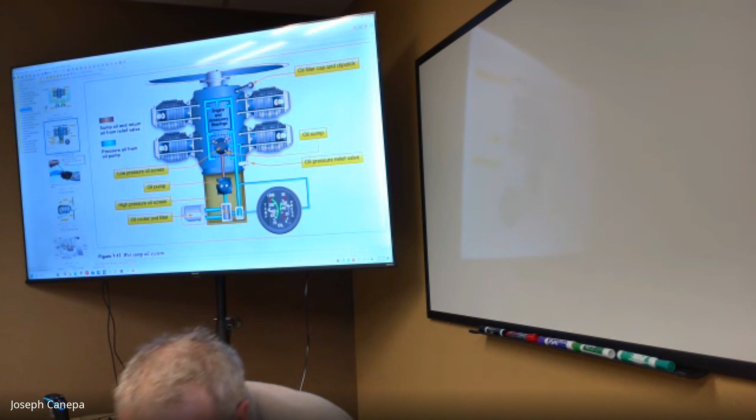No questions so far on any of the engines stuff that we talked about, systems?

Hey, Tegan. Hey, Jocelyn. Good, good.

Tom Cunningham is coming in today, I hope, at 10:30. He's an A&P, actually retiring. He has a very successful aircraft maintenance business over there, but at the end of the month he's retiring. He said he'd come in and talk to you guys a little bit about A&P, airframe and power plant, mechanics type stuff, a couple things.

I thought that would dovetail well going into the aircraft systems and then instrumentation. Next week we have Alyssa McGraw, an engineer from Sierra Space. They build these habitats that actually go into space. They're probably going to take the habitats she's designing to Mars—well, not quite, but very fascinating what she's doing there. If you get a chance, look up Sierra Space on YouTube, they did what's called a destruction test. What she designs are these habitats that inflate in space.

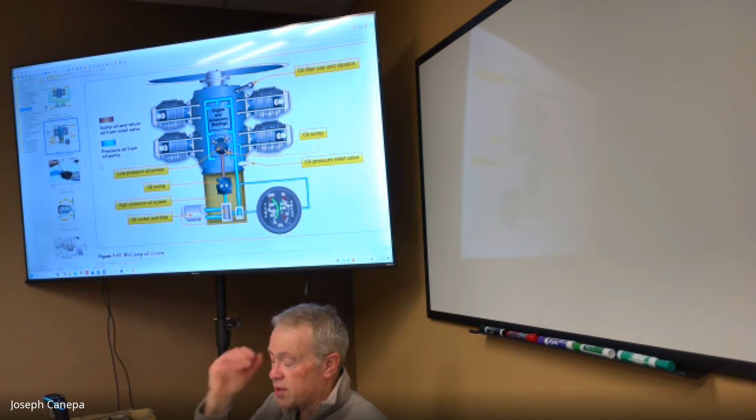And then someday I'll be over here with the twins. My twin is just getting out of annual inspection, so I was thinking of later in the day. There's still some things they've got to finish up on it, so that happens. Let me see something.

The twin Comanche actually does have 6 seats. The 2 far back seats are really small, basically for very small people, kids. I removed them and just use it as a 4-passenger—it's also better for insurance.

It is designed to take 6 people. A lot of what you're finding in aviation is that a lot of planes with 6 seats or 8 seats are somewhat restricted by how much fuel you can put on board. You can't do full tanks and then load all the people in the plane—you can't throw in all the baggage and all that stuff too.

I think you have to be really careful. Jason and I were just talking about weight and balance, so that's something we're going to talk about, and you'll see it when we do weight and balance. Because if you load it incorrectly or if it's overloaded, the plane may not even get off the ground. Or worse yet, it'll just get off the ground and stay in ground effect—it'll just hover.

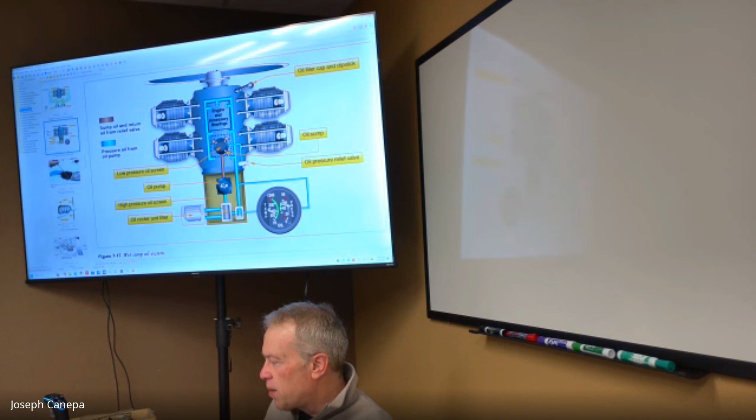The dipstick we're all familiar with from the car - it's the same thing here. The oil pressure relief valve - if there's too much pressure, it's going to release that. So the main components are the low pressure screen, the high pressure screen, the filter, and the pump. That pump is going to push it through little galleries in the crankcase, so that everything that needs to get oil gets it.

Another thing that oil does is help prevent corrosion. After you get done flying, that oil is kind of splashed out all over the place, and that helps keep the water from getting into the metal.

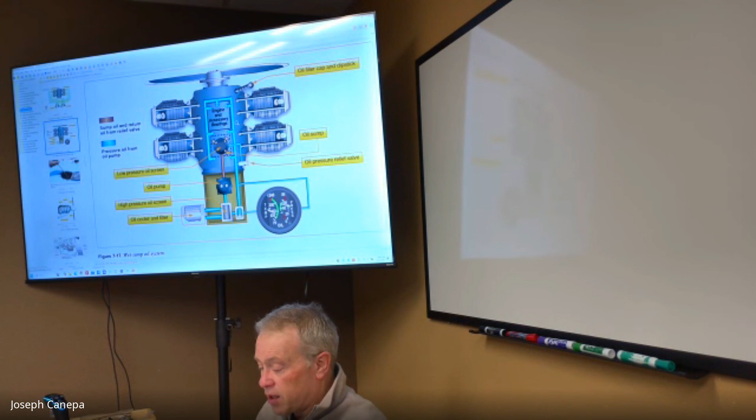So oil is super important. That's why when we do pre-flight checks, that's one of our primary things. There's a lot of things you might be able to skip, which is not a good idea, but the one thing you never want to skip is the oil. You always have to check to make sure. If you had to jump in a plane in an emergency, the first thing you would do is check the oil.

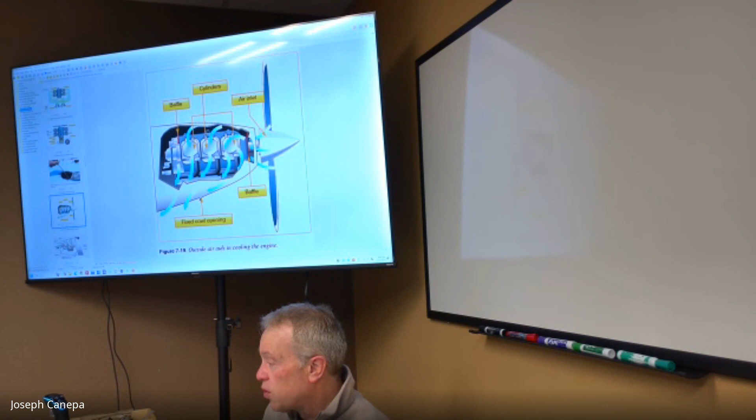So other types of cooling systems. Oil cools the engine, but we also have open cowlings. This is a cross section of an aircraft. In the front, you've got openings on either side of the prop, and we can see air flowing through. How the air flows through that engine is very critical. Engineers design these cowlings to very tight specs to get proper airflow across the cylinders, flowing in and around them, drawing the heat away.

This right here is what's called a cowl flap. It's just a little opening. If you look at the bottom of the cowling on some higher performance aircraft, they'll have a little door that opens up. Usually when they're on the ground, that door is open, primarily because you're not getting as much cooling effect from the air. So they open it up to allow more air to flow through. The Cessna 182 is a classic example. It's like a 172, but with a beefier engine, and because of that, it has these open cowl flaps that allow more air to flow through.

So, engine cooling systems. Then obviously we've got water cooled engines, which we don't see generally much in smaller aircraft here.

Does anybody remember the 4 strokes of a 4-stroke engine? Power stroke, exhaust - yeah okay. Those can be hard to remember, but just remember, when you breathe, you're literally like a human 4-stroke engine. You're inhaling - that's the intake - and then you're compressing, generating power with your lungs, and then exhausting it. So you've got 2 of the 4 strokes there: inhaling and exhaling. The power strokes are in our lungs, from the way we're made up.

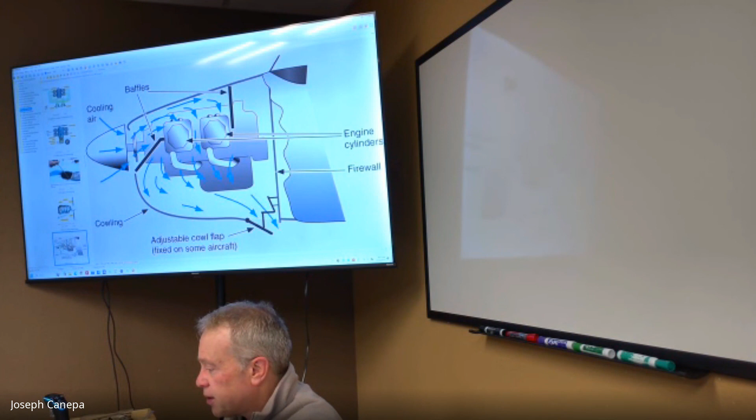So how this works is, after you do your pre-flight inspection and test everything and you're ready to start, you'll call clear prop, then hit your alternator or battery button - sometimes both at once, but usually at least the battery - which ties the battery into the system. Then you'll turn this key switch, sometimes just a push button, not always a key inserted into the panel. You'll turn it past left, right, both, and then it springs back to both. So you crank it to start, the engine cranks, and once it's started, you let go of the switch and it falls back to both magnetos. So again: off means the magnetos are off, then left magneto, right magneto, both magnetos.

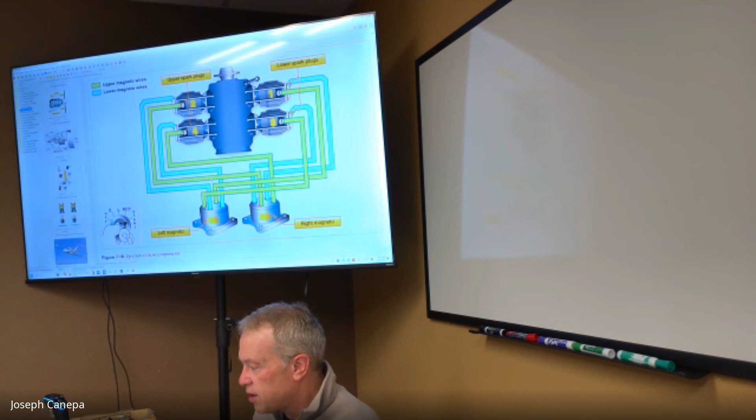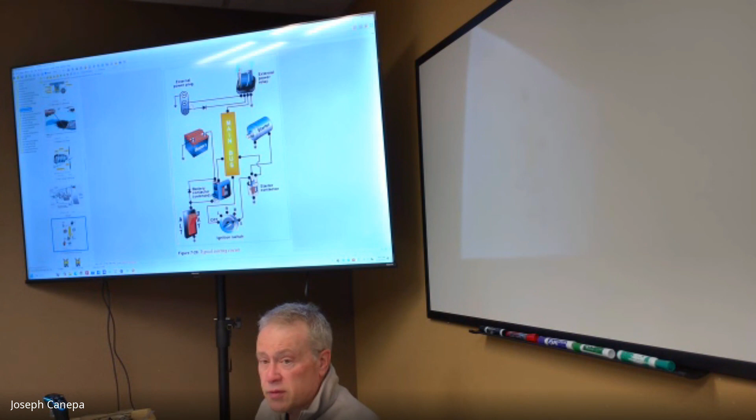A lot of aircraft do have an external power plug to jumpstart it. If you need to jumpstart it, you just plug that in and go from there.

So they do talk a little bit about two types of scenarios here, the combustion process. There's a couple things that can happen with combustion. It's kind of curious, but normal combustion is when the spark plugs ignite the fuel air charge, and there's a wave front that pushes out and generates pressure against the piston and pushes the piston back, so it's a nice smooth flow. A lot of times, at least this is what I thought before I learned about this - I always thought it was just an explosion in the cylinder that blew the piston back. It's not the case at all. As a matter of fact, you don't want that because it's very hard on the engine. So normal combustion is like somebody pushing on that piston, pushing it down and getting it to rotate the crankshaft. This would be normal combustion.

Explosion, or sometimes what's called detonation or preignition - those are two terms you're going to have to know for the test, by the way. I'll get into that in a second here, but that's when something happens, something goes wrong. There's too much pressure, and the fuel air charge explodes. It can damage an engine in some cases in as few as 10, 15 seconds if you get a lot of that. So detonation is a really bad thing for an engine. Normal combustion, obviously, is what the engines run on.

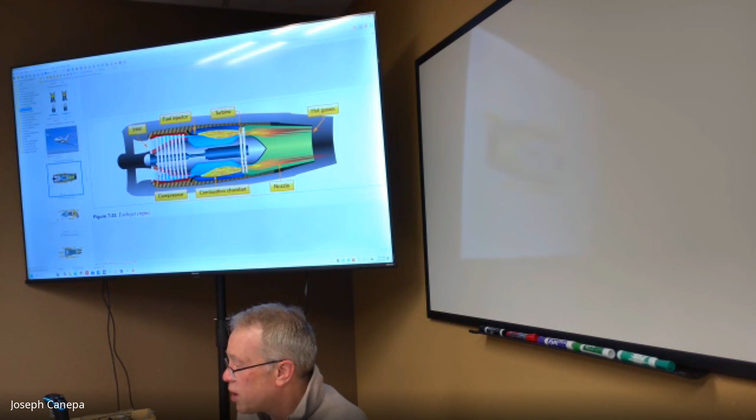This turbine right here helps drive the engine. As those exhaust gases pass through it, they spin this, causing this whole shaft to spin. There may be some gear reduction there or an increase, but regardless, you've got expansion through the combustion chamber and then it blows out through the exhaust. Notice how small and narrow this whole engine is, whereas if you go to a turbofan...

So this is a turbofan engine. Notice you've got a huge fan out in front. A turbofan still has the same 4 processes: intake, compression, combustion, and exhaust. But the big difference is you've got this big, huge fan that bypasses the inner part of the turbojet engine. This is actually designed to produce thrust, but it produces it outside of the engine itself.

That's why a lot of the jets you see nowadays on commercial flights are turbofans with big, huge openings, whereas in the old days, the 50s and 60s, those were all turbojets, and they found that they were very inefficient. With turbofans, you get much more efficiency when you suck in some of the air and blow it out outside of the engine housing. So that's the difference between a turbojet and a turbofan.

A turboprop is very similar to a turbofan engine. The only difference is you've got a gear reduction box on the shaft, and then you have a prop in the front. So instead of the turbofan, you have this gearbox that drives a prop itself. Good examples of that would be like the King Air series aircraft.

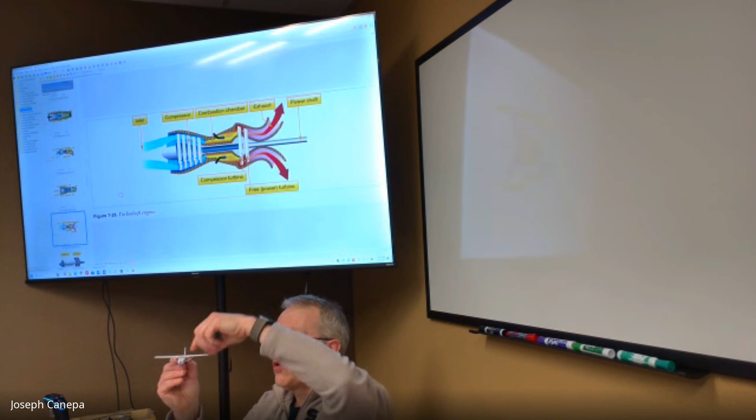Cessnas typically store the fuel in the wings, so you've got two tanks, one right here and one right here in the wings. Because of that, and the engine down here, we can see it below the tops of those wings. So they fill the tanks up here. These are what we call gravity fed in most cases, like all the 172s - most of them have a tank up here and they'll just do gravity feed.

They'll just allow gravity to flow down from here. A lot of the newer Cessnas, I think after some point, they put in boost pumps, auxiliary boost pumps, in there just in case the gravity wasn't enough to get the fuel down to the engine. But in most high wing, especially older high wing aircraft, it's just gravity fed - no boost pumps or anything like that. It just flows down into the system, into the engine, and then you get started there.

A low wing aircraft, however, has its wings and fuel tanks below the engine, so you need some way to get that fuel up into the engine for it to work. So we have electrical boost pumps - they run off electrical power. And then there's the other type of fuel pump, an engine driven fuel pump. Does anybody know why we would have both electrical and engine driven fuel pumps?

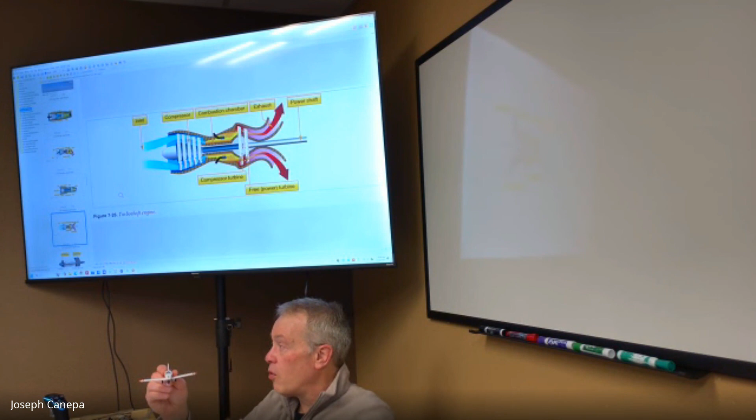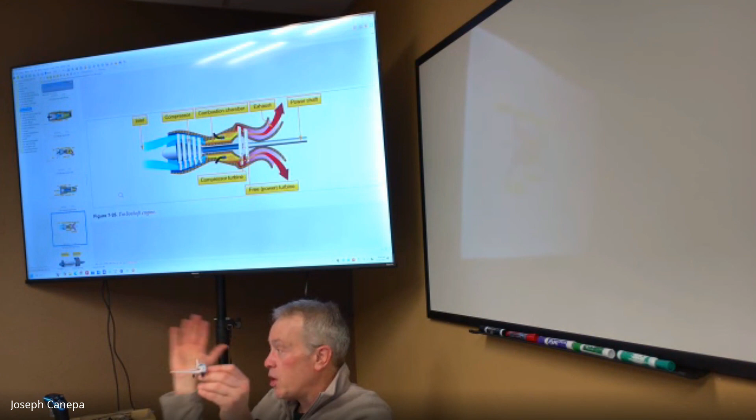You'd need the electrical one because if the engine wouldn't start, you'd have to have an electrical pump to get fuel to the engine to start it. There are other reasons too - redundancy and backups. You need to have those because an engine-driven fuel pump can fail, though it doesn't happen very often. If that happens when you're in the air, obviously that's a problem. So if you've got your electrical fuel pump, you just turn that on and the plane keeps flying, then you land someplace and get the engine-driven fuel pump taken care of.

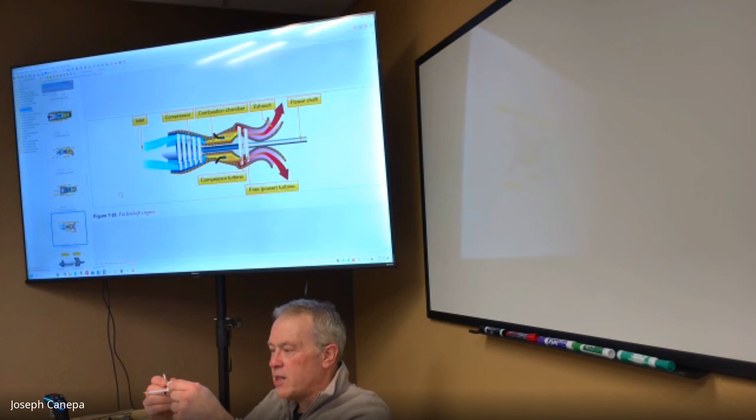So the engine-driven fuel pump is exactly that - it's driven by the engine, pumping fuel into the engine while the engine's spinning. Whereas the electrical fuel pump runs when you turn it on and have power to it.

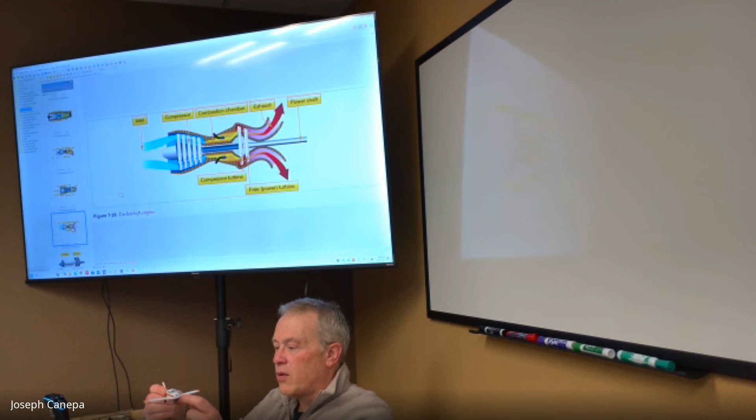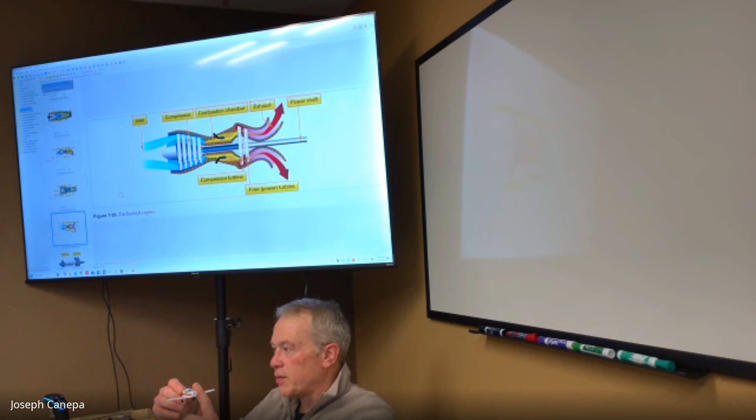The other thing that fuel pump will do is help with priming. Normally most aircraft will have what's called a primer. In the old days, your grandparents might remember this, they had to prime the engine. What that means is they would squirt some gas into the cylinders to get the fuel in the cylinders to get it to start.

Have you guys ever worked on engines and had to start it up using a spray starter? Yeah, we have a snowblower and you have to press the pump. Yeah, it's like a little rubber bulb to start it up. Yeah, so they still have that. That's right, I forgot about that. A lot of the weed eaters and things like that have a little primer too. Leaf blowers, yeah. So that's the same concept you're doing there in the engines. You're going to have a primer.

This is a curious little story. In World War II, there was a fighter pilot that had lost his electric pumps, his engine-driven fuel pumps, and he was coming across the channel and had to land on land. What he found out was that he could use the primer to keep fuel going to the engine. He just had to time it right, and he kept fuel going to the engine with just the primer. So if you ever get stuck in a situation where the fuel pumps are both dead, which would be extremely unlikely, you can use your primer to keep pumping fuel into the engine. It's not good for the engine, but it'll get you down if you needed to do it. I think he did it for like 15, 20 minutes, kept on pumping it, and was able to land it safely.

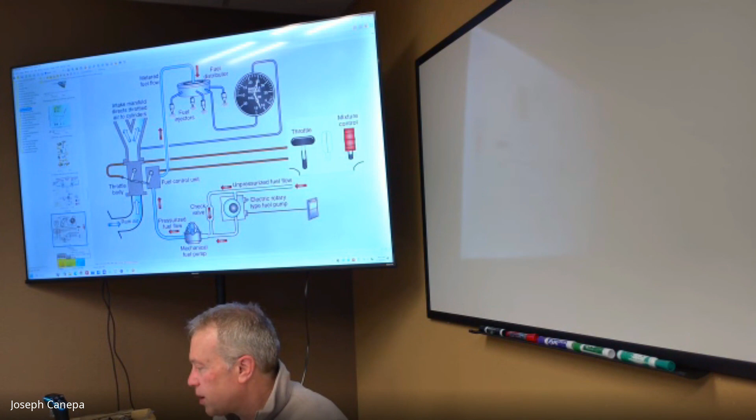There are several different grades of fuel, and some aircraft can only burn certain types. So when you're fueling up an aircraft, you don't want to put in car gas or something like that. Though there are some aircraft that will allow you to run what we call MOGAS in the aviation industry, which is just car gas. They have what's called an STC, which stands for Supplemental Type Certificate, that allows that aircraft to burn auto gas or MOGAS.

Most pilots are going to want to fly with aviation fuel. It's very expensive, typically on the order of at least twice as expensive as car gas. So if you pay $3 for auto fuel, you're going to pay $6 for aviation fuel.

But they're designed to run on air-cooled engines, and the way the engines are designed there's all these different things that are different than an automobile engine that's water cooled. So they take all this stuff into account and they create this blend of aviation fuel.

There's several different types of fuels. The most common one is going to be this 100 LL, which stands for 100 low lead. It's not no lead, it has some lead in it.

Back in the old days, in the 70s, 60s, 50s, car fuel had lead in it. The reason they did that was because the lead actually helps lubricate some of the components in the engine. It also does some other things in there, but what they found though is that lead was extremely toxic. There's a term for it, I can never remember the name of it. It's a special chemical they put in there, and it's very bad. The federal government said we can't have this stuff, people driving cars around with this lead in it, so they banned lead from automobiles.

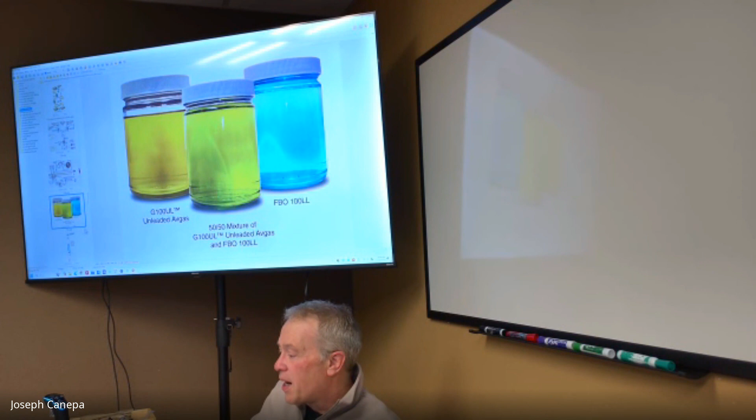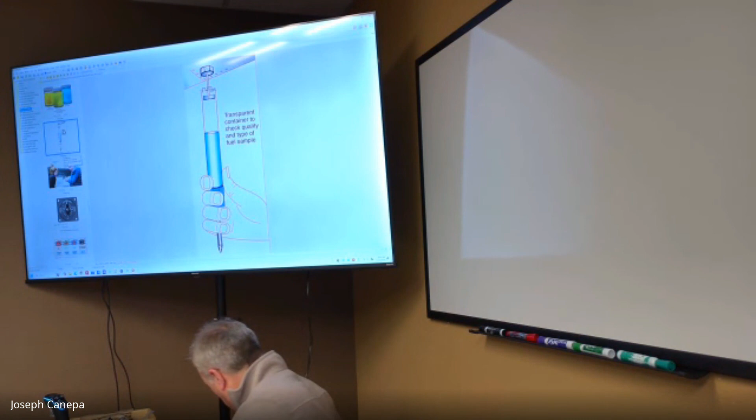So this is basically like a test tube. It's got like a little wire in it. Jace, you've seen it before where you do your pre-flights. Isn't it like on a high wing? Isn't it more like a strap? Like I've done a pre-flight where... Oh yeah, that's another type of way of checking it. So it's like a transparent straw you stick into the fuel tank. You put your finger over it, and then with suction it draws it out. Then you can look at the color of the fuel. That's what I see, yeah.

So those actually measure how much fuel you have in the tank. This right here is draining the fuel out. This is on the bottom of the fuel tank right here. There's like a little nut, and in the center of the nut there's a little hole. What you do is take this little device right here, it's just like a beaker with a little wire on it, and you stick it up into that hole and push it up in there, and it drains fuel down into this test tube.

And then you can actually inspect it for a couple things. Number one, the color of the fuel. It should be light blue. What's that, like if you have water? Absolutely, I'm glad you brought that up. With aviation fuel, it's very light compared to water. So because of that, if there's any water contaminant that's sitting at the bottom of the tank itself, where this drain is, it's going to be somewhere probably back here, you'll see it.

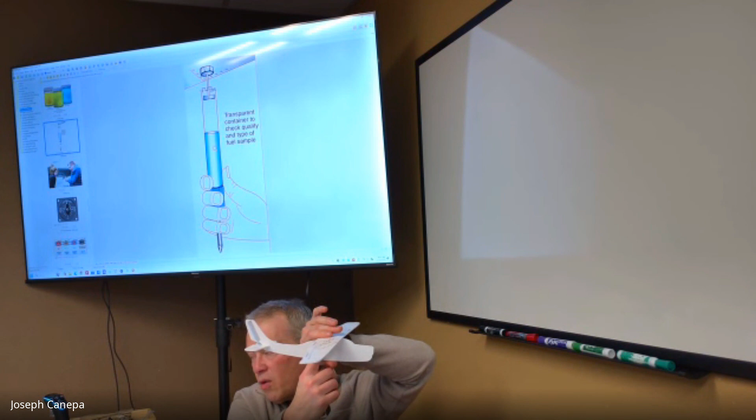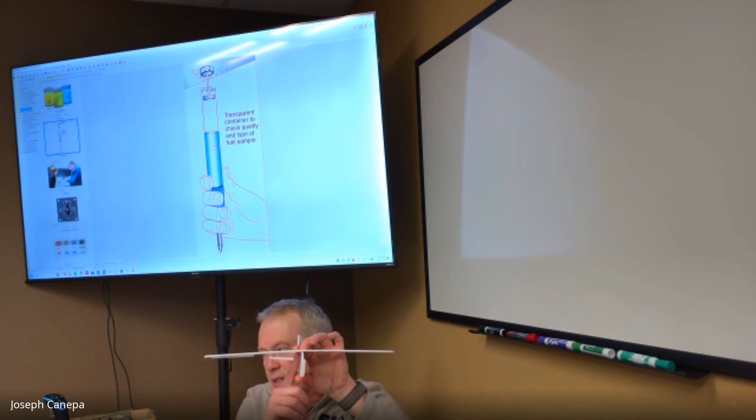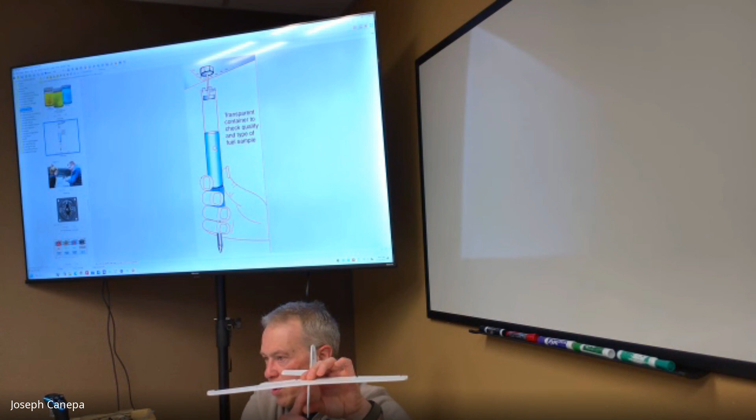There's like a little hole there. If you ever look at a high wing aircraft, you'll see it about that point right there. And again, on this side, same thing, same place. You're going to have one on this tank as well. That's the lowest point of the tank itself. What you'll do is take this little thing, stick it up in there, and it draws the fuel, just kind of leaks down into the little tube there. You hold it up to the light, but because it's the lowest point in the tank, if there's anything heavy in the tank, that's going to go to the lowest point.

And when you put that little fuel tester up there and fill it up, if there's any water in there, it'll get drawn into the test tube itself. What you're going to see is little tiny bubbles on the bottom of the fuel tester. You're going to actually see little bubbles. If you see anything like that, you want to drain more fuel to make sure there isn't more contamination, because obviously water doesn't burn. And if you send it through the engine, if there's enough of it, the engine will just quit. So we look for any differences, and it's very distinctive. The fuel itself does not mix with water, it's like oil and water. Same thing with the fuel and water. You'll see these little tiny white clear bubbles on the bottom of it.

So again, we're looking for, number one, the color of the fuel. 100 low lead is that blue color, kind of a blue tint. You're also looking for contaminants like water bubbles. I've heard of guys draining out their engines after a bad storm and getting nothing but water, so they don't see any blue or anything like that. So you always want to make sure that you check the color.

Yes James, have you ever had water? I have, yeah. It's never caused me problems because what I typically do when I see that, I'll actually drain out quite a bit more fuel just to make sure I draw everything out, and then I'll run the engine up just like I would normally to make sure there are no issues with it. You would notice like shutters, if there's small amounts of water in, it'll make it shudder.

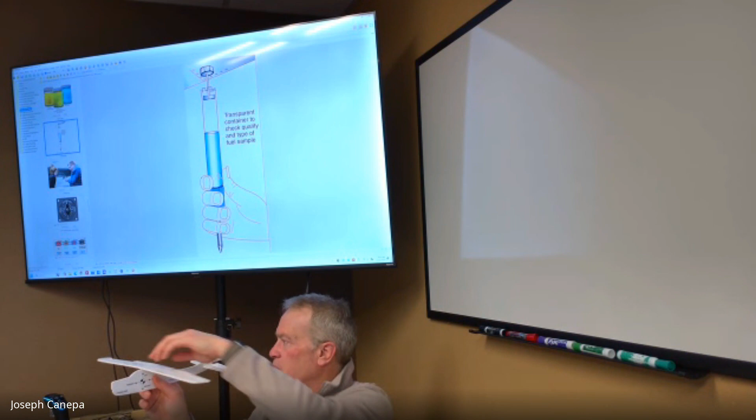Another thing that I do oftentimes, before I actually do the pre-flight, I'll just rock the wings like this. I'll come over here, grab a wing and rock it like that. What that does is it splashes the water up inside the tanks there. It splashes it and picks up some of the condensation that forms inside the tanks. And then that stuff will just over a period of a couple minutes start draining down into the low spot. So that's something you want to consider doing.

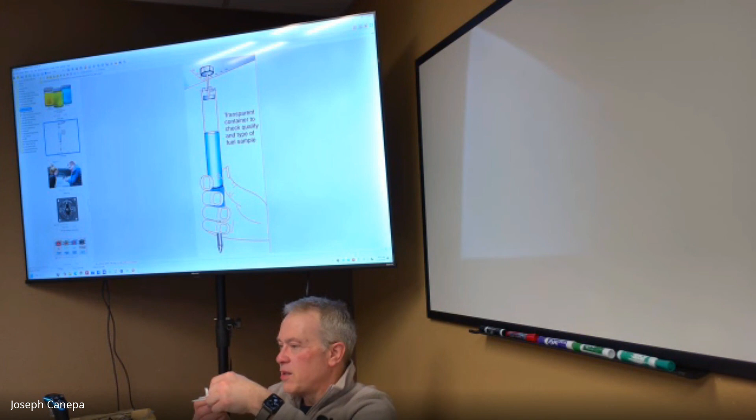So obviously a rainstorm can be bad if your fuel caps don't have good gasket seals. Is there anything else that could happen on a hot, humid day with engines? Is there anything we have to worry about inside the tanks?

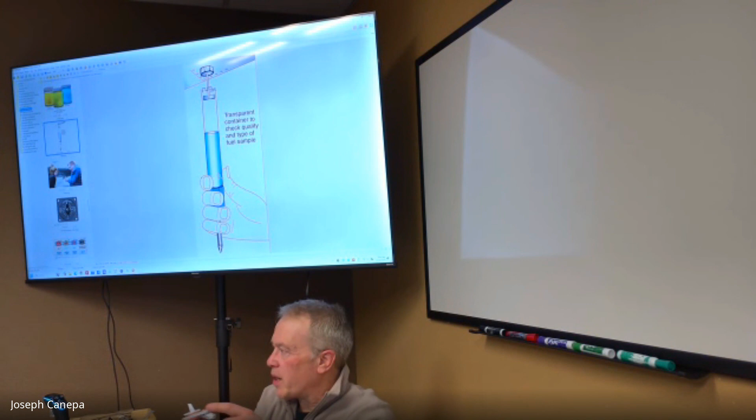Humidity is definitely something to worry about if it gets in there. You've got these tanks inside the wings, and if the tanks are low—let's say the person who flew it before you didn't fill it up—what can happen is dew can form on the insides of the tanks. If there's any moisture in the air, it can condense on the inside.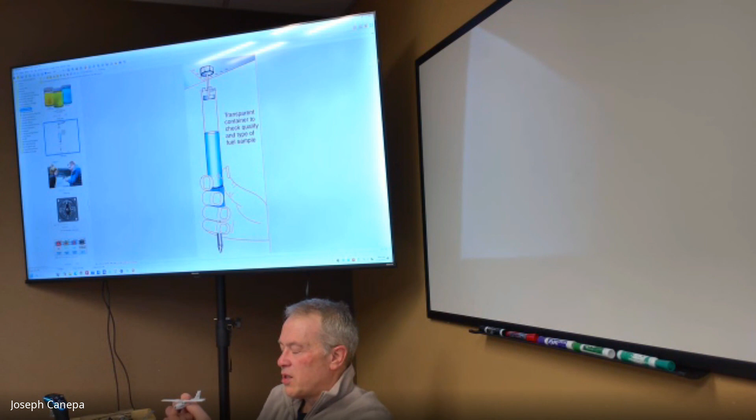That's why I always rock the wings. I walk up to the plane, grab the wingtip, and rock it like that. It splashes the fuel up and washes the dew inside the tanks down to the bottom. Then you give it a couple minutes for the water to settle, and if you drain the fuel sumps, you'll actually see the water in there. So if you're going to fly and the tanks are low and the plane's been sitting outside, that's a good recipe for possible water in the tanks.

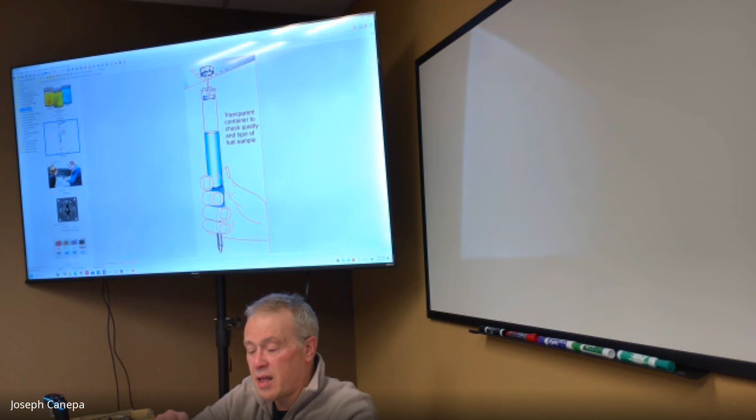There's another reason why I rock the wings periodically. Most tanks on newer aircraft just use the walls of the aluminum—basically the surface of the wing itself is the tank. But a lot of older aircraft, including one that I have, use what's called a rubber bladder. Rubber bladders can crack over time, and what they recommend is that you keep splashing fuel up on the sides of it. It keeps it hydrated, and the tanks last longer.

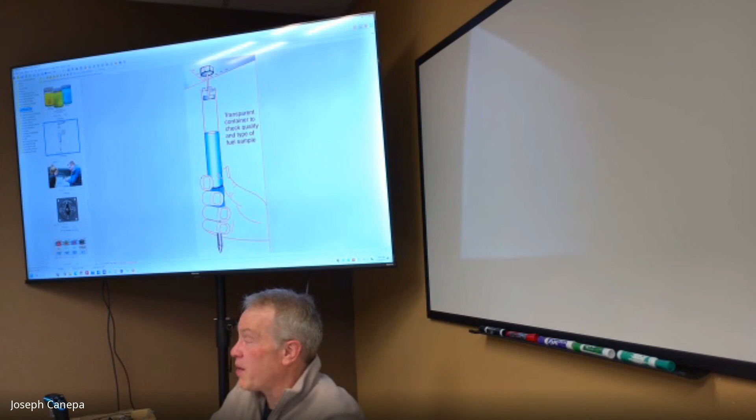Rubber bladders are mainly used in a lot of the different warbirds, because if you had a stray bullet go through it, the rubber would actually reseal itself. Yes, they call them self-sealing fuel tanks, and the B-17s greatly benefited from the self-healing fuel tanks.

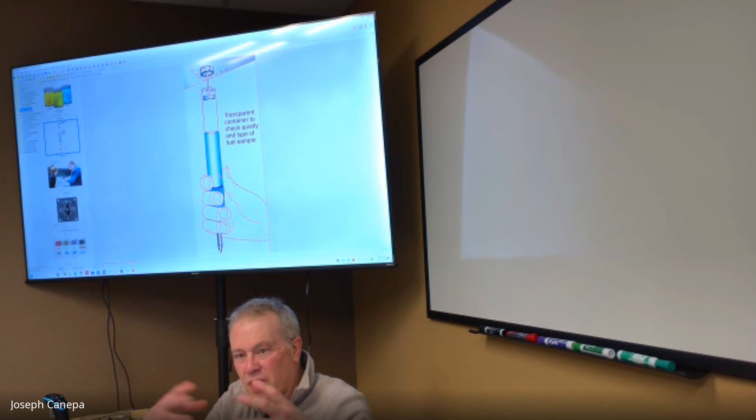So how would they crack? Well, if you let a piece of rubber sit for a long period of time, it can develop cracks. Rubber dries out—it needs some sort of moisture in it, whether it's fuel or something else, but typically you want to keep it moist with fuel. So all you're doing when you rock the wings is splashing that fuel around, keeping the rubber moist, which helps prevent it from drying out and cracking.

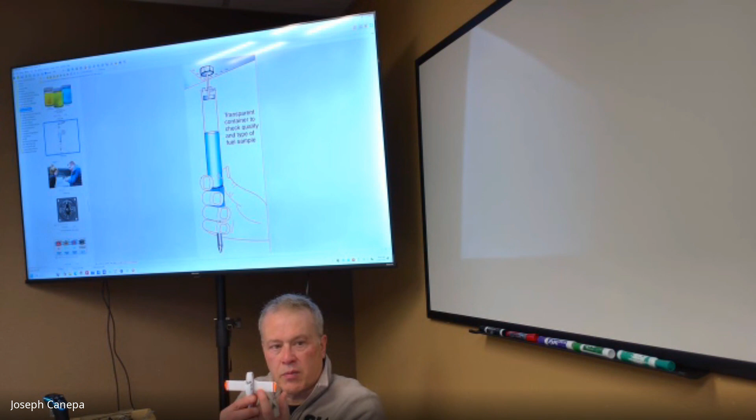So a couple of reasons why, if you bought a plane and wanted to take really good care of it, you'd want to find out things like whether it uses rubber bladders. If so, you want to make sure they're okay. What you'll see on the plane is weeping from the edges of the wings—if your fuel tanks are leaking, you'll see little blue stains that flow backwards on the wings, usually right here, from the color of the fuel, in this case 100 low lead for these smaller planes.

So, fuel contamination—again, water, but also debris. Sometimes if somebody just fueled up your plane and you see a fuel truck pull up, that means you were basically getting the last of the fuel they were using, which means you're probably sucking in a lot of sediment. When you fuel from a main tank, there's always the possibility of getting some sediment from the bottom of the tank. They've got filters on these fuel systems, but it's not always a guarantee that the fuel getting into your plane is contaminant free.

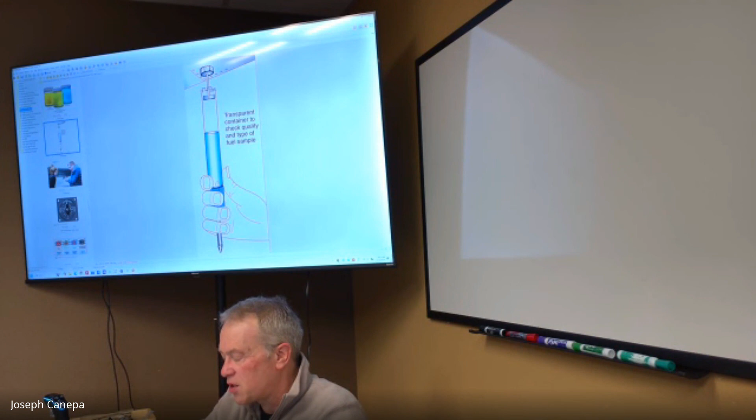So if they just filled up the main fuel tanks at the fueling station, you're probably going to be all right. But if they run them dry, you have to be really careful because you could get some serious contaminants in there. Okay, any questions on that?

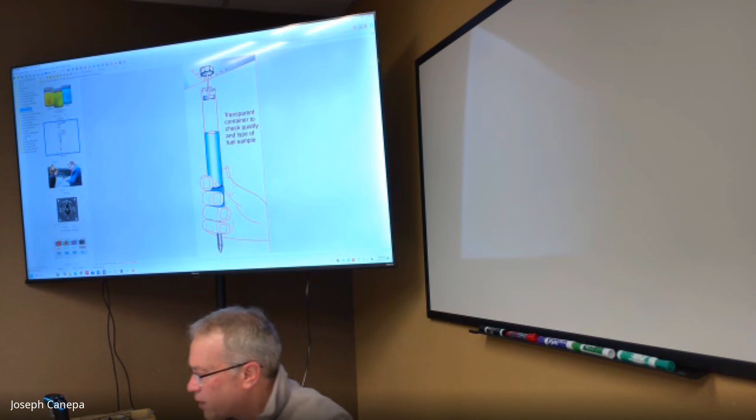Fuel system icing, page 728. Again, not something you really have to worry about with general aviation. The only time you're going to have ice, you need to have something that can freeze, like water. Obviously, if you get a lot of water in a system, that potentially could freeze. Water has to get in the fuel system in order to freeze though. This is different from carburetor icing. Good observation.

Sometimes with icing systems, like maybe Cirrus, Cirrus has got what's called a weeping wing, and we can talk about that in a second. But this is actually fuel system icing that we're talking about here.

With fuel system icing, it's usually a result of getting water in the fuel tanks, combined with really cold weather. What will happen is when the water gets down into the fuel selector valve, where the valves are, that's where it's going to freeze up, and that can spell disaster if it happens in flight. Generally it's not a problem because you have tested the fuel to make sure there's no water in it, and as long as there's no water in it, you should be good to go. But it is something you have to be aware of when conditions get really cold.

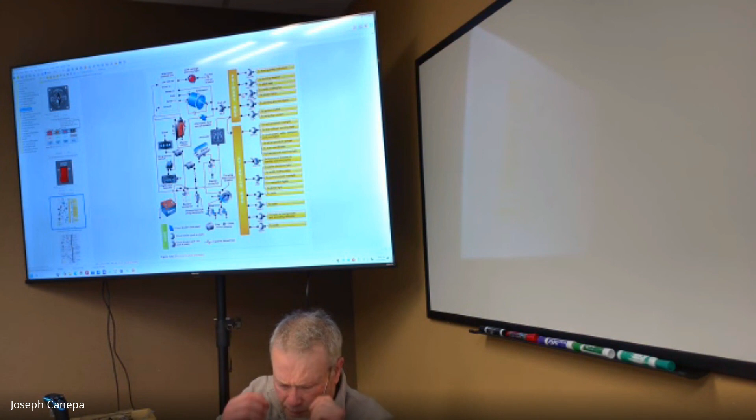If you fly in really, really cold weather, the fuel can actually gel up. It would have to be super cold, and I don't think anybody would encounter that. I don't think the FAA even talks about that on the test. But that is possible for fuel to gel. It's more of a problem with kerosene or jet fuel.

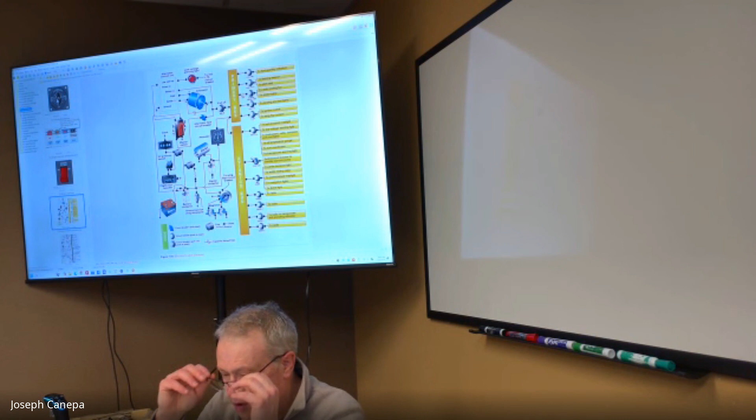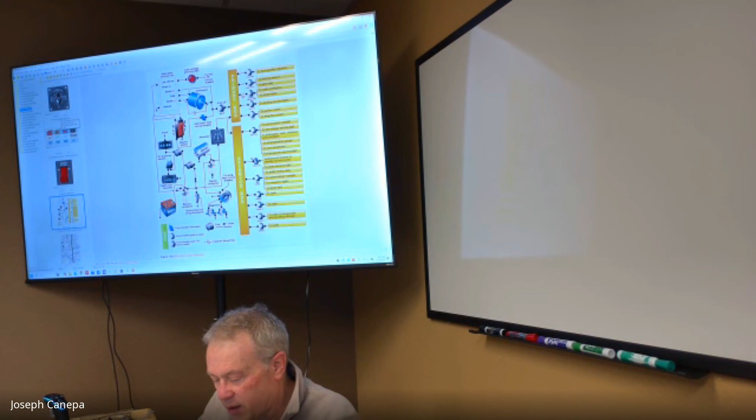Refueling procedures, again just common sense stuff. Whenever you're refueling an aircraft, you always want to ground it. So whenever you pull up to a fueling station at an airport, they have a grounding cable that you pull out of the station and attach to some piece of metal on the plane. That's going to discharge any static that may have built up on the plane. And then from there you can go ahead and connect the fuel, turn on the power, and fuel up.

Method, yes. Okay, so what I'm looking for: with a twin engine, you have the engines outboard. In a regular single engine aircraft like this, the engine's right in front of the cockpit, right here, and we could actually draw heat off the exhaust manifold and pipe it into the cockpit. On a twin engine, you've got the engines on the outboard sides of the wings, on the mid portion of the wings, and there's no effective way of routing the heat from the engines into the cockpit.

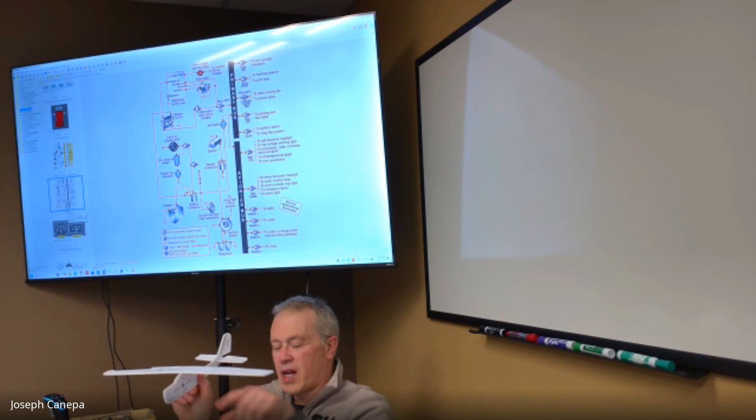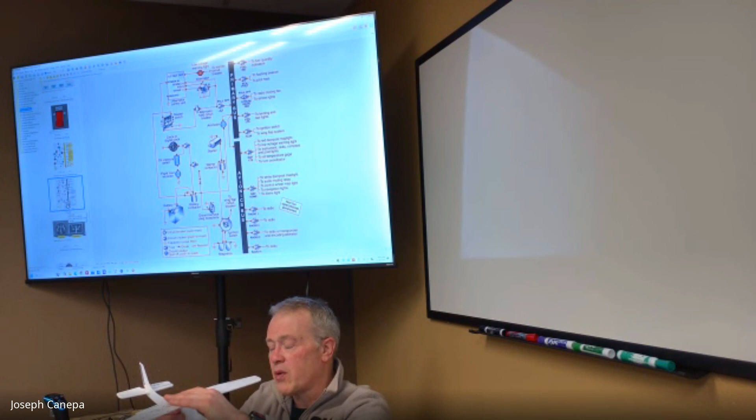So that's why we have a small heater, this Janitrol heater. I think there's another company that makes them as well, but Janitrol is probably the most common one. It looks like just a coffee can, and it sprays in fuel, creating heat when they ignite it, and that blows it into the cockpit. So that's one type of heating system.

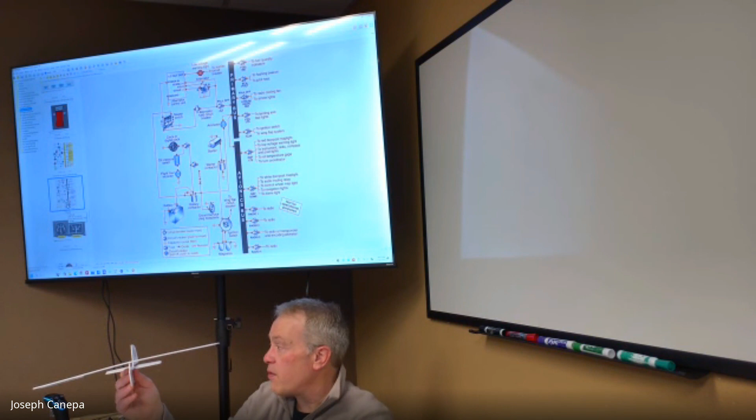The most common type of heating system in an aircraft is that exhaust system. You're basically tapping into the exhaust of the plane, the heat from the exhaust, and piping that into the aircraft. Now there's some potential problems with that. You may guess what that might be. Did somebody say exhaust?

Exhaust? What's that? Yeah, exhaust going to the cockpit. What's carbon monoxide? Carbon monoxide is a byproduct of the combustion process, and obviously it's toxic to humans.

In a single engine where you're just drawing heat to heat the cabin, there's what's called a shroud that wraps around the exhaust manifold, that exhaust pipe that comes off the engine. That gets really hot—aircraft engine exhaust is very hot, like 1,100 to 1,500 degrees, and that heats up the exhaust pipe. There's a shroud around that, and in that shroud you collect some of that heat, and it goes into the cockpit. That's how we heat single engine planes like this.

Low wing, high wing, it doesn't make a difference. If it's a single engine, you just take advantage of that. That way you don't have to have a separate furnace like I have in the twin.

But the drawback is that if you develop a crack inside the exhaust manifold or that tailpipe, carbon monoxide can leak into that shroud around the exhaust pipe, and that can go into the cockpit. There was actually one somewhat famous incident.

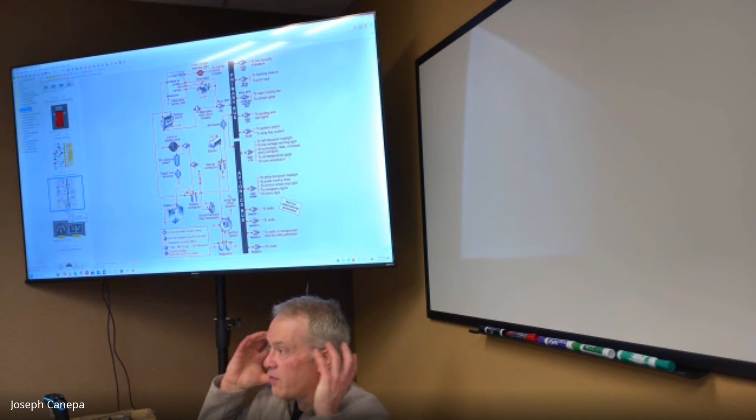Yeah, essentially the bottom line is your brain can't function. This guy passed out because his brain just stopped working—he didn't have the proper oxygen to the brain, and he wound up passing out. So oftentimes it's usually pretty tragic when you get carbon monoxide poisoning.

So they do have carbon monoxide sensors you can get. I don't know if you've ever been in a plane—is there like a little card someplace that says... My instructor's headset has one. Yeah, a lot of the new technology today can sense it through sensors built into the headsets or the avionics. They'll have a sensor, but you can also buy little sensors and mount them on the plane. They've got chemical sensors—just a sheet of paper that changes color if it senses carbon monoxide there. So let's see, we're just about done here.

Yeah, bleed air heating systems. This is on page 730. That's going to be something you'll see on a large jet, like a commercial jet.

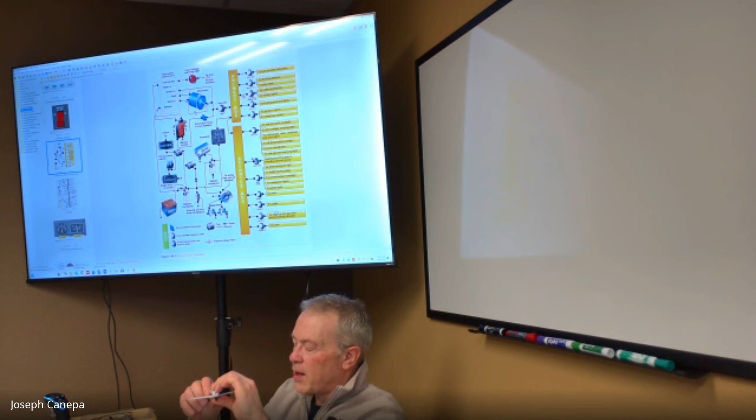Let's say this right here is a radar station. When the radar swings past, it sends out what's called an interrogator signal to the aircraft. The aircraft responds and says, I'm 1200, I'm flying at this altitude - roughly, this is kind of a rough estimate. We'll get into this a little bit later.

With the transponder, since you can control that, you can put in codes given by ATC, or if you have an emergency - let's say you can't use your radios - there's a code like 7700 you could squawk saying you've got an emergency, or 7600 meaning you can't communicate. That just tells ATC that you've got some sort of emergency or can't communicate with them.

So they're going to divert a little more attention to you, because if you've got a real emergency and you can't talk, they want to make sure you've got a clear path to get to the nearest airport or something like that.

Now, there is a hijack code - do you know what that is? Yes. Is it either 1500 or 7500? Yeah. And isn't 1200 just general? Yeah, it's like if you're flying today - if we were to go out flying on a VFR day, we take off, we'd be squawking 1200.

What happens there is that radar beam from Madison and from Gold Field, when it hits our aircraft, our aircraft responds to that radar beam hitting it by sending out the code we have set. So we always check the code before we turn on the transponder, because in some old style transponders that had dials for each of the 4 digits, you could easily accidentally pass through 7700 or 7500 or 7600 and squawk that to Madison or Gold Field.

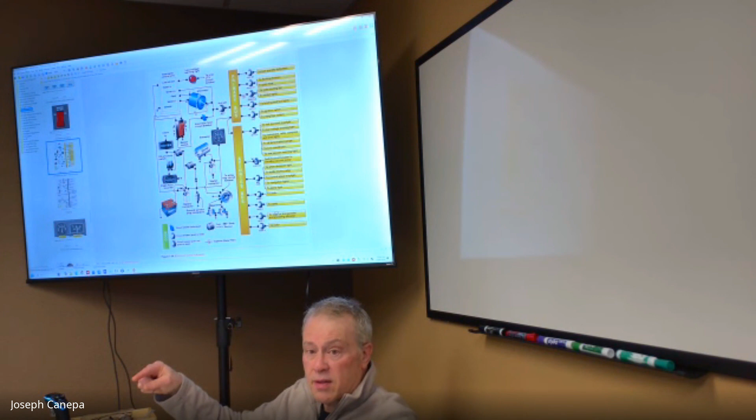So the battery has got full power when we land. It doesn't have power to run during the entire flight. If you got a long 5-hour flight, your battery would only last maybe 30-40 minutes or something like that. And if it's colder out, it's going to probably last even less than that if you've got all your avionics on and everything on.

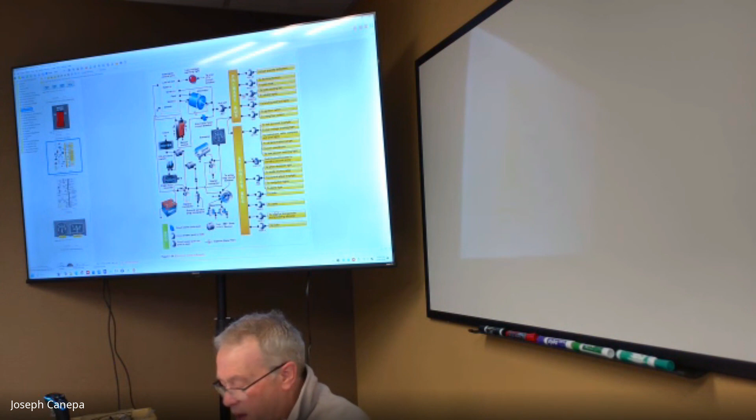So you want to have that alternator running. So we have a battery switch. This is what you'll see in a lot of small aircraft engines. You'll have a battery switch right here. All that's doing when you hit that switch is turning on the power of the battery.

It's connected to the battery to the main power bus for all the avionics, making it available to them. That doesn't mean all your avionics are going to turn on the minute you press this. There may be another switch you have to turn on, or you may have to turn on the individual avionics. But the alternator, that's a separate switch. When you turn that on, it means the alternator, if the engine's running, can charge up the battery and provide power to the rest of the aircraft, not just the battery.

So that's why we have two switches there: an alternator switch and a battery switch. On twin engines, you're typically going to have two alternators, so there'd be two alternator switches, one battery switch, and two alternator switches, one for each engine.

The alternator thing you can hear when you first turn on the battery. No, that would be like a turn coordinator. It's some kind of a whining sound. Yeah. So, does the plane that you fly have the old style turn coordinator where you can hear a whining sound when you hit the master switch?

Yeah, so a lot of what you're typically hearing whenever you turn on the master switch in an aircraft is usually the turn coordinator gyro spinning up, and it makes kind of a high pitch sound there. But yeah, that's what you're hearing. The alternator won't make any sound until the engine is started, and then you won't be able to hear it at all.

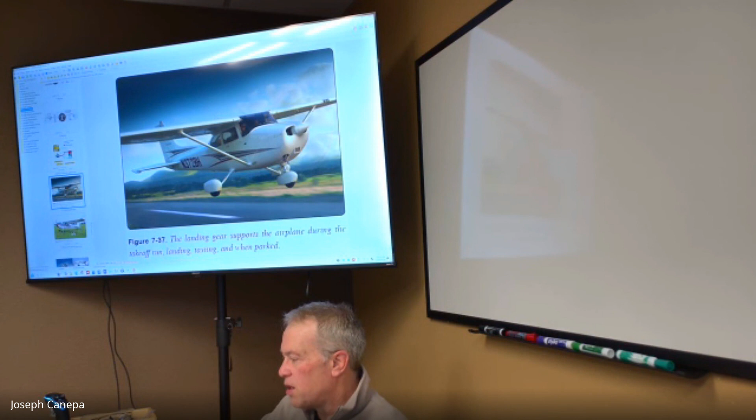Wouldn't you not be able to see anything until you get like... Yeah, it's a good observation.

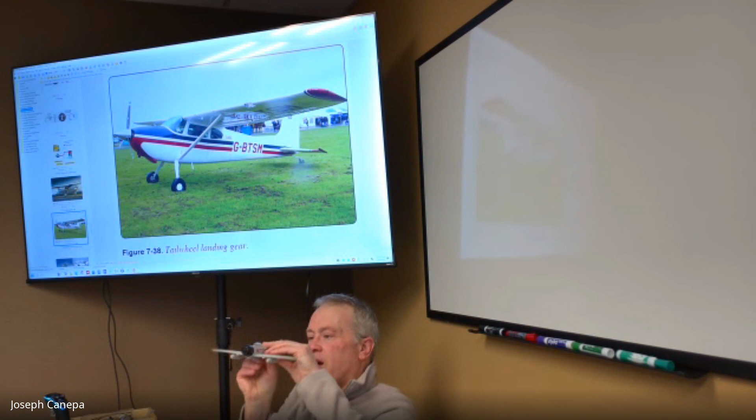And a lot of aircraft, what you have to do is taxi back and forth like this and look out. You'd use your brakes probably, or maybe they wouldn't, it really depends on the situation. A real narrow runway, they'd probably have to use their brakes. If it's a wide runway, they'd probably just taxi back and forth there. What they're doing is looking out this way when they're going like this, and then when the plane turns like that, they're looking out this way and looking straight ahead to see if there's anything in front of them.

Well, once we get to higher speeds, we'd still be on the ground with the tail starting to lift up a bit. You wouldn't taxi like that, it's too dangerous. But when you're taking off, yeah, when the plane takes off.

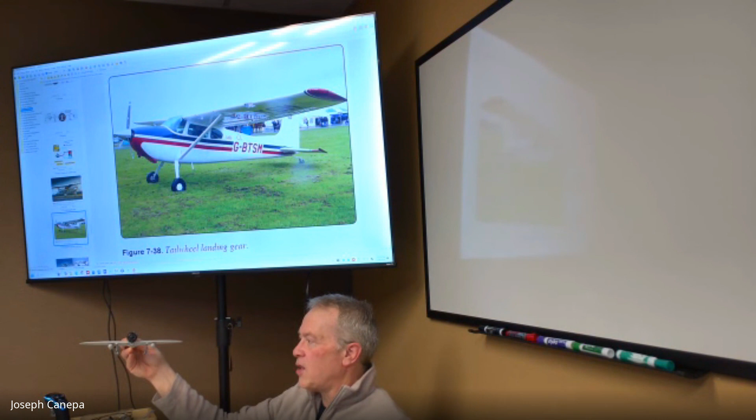So what Trey's talking about is when the plane takes off. Let's say I'm taking off on this runway. This is how the plane looks when it's taking off like that, or when it's just taxiing like that. That's the attitude.

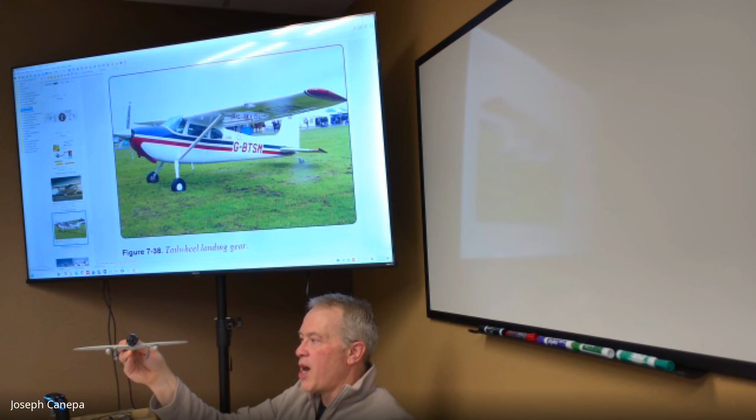When you take off, let's say the runway's this way, the plane takes off. What's going to happen is the guy's going to get full power. It's got a lot of torque, so it's probably going to pull to the left a lot. But as you get more air flowing over these surfaces, the elevator gains a little more authority and the plane rises up like this. Now the pilot can see out in front of the plane itself. That doesn't happen until you get enough speed to get some elevator authority there.

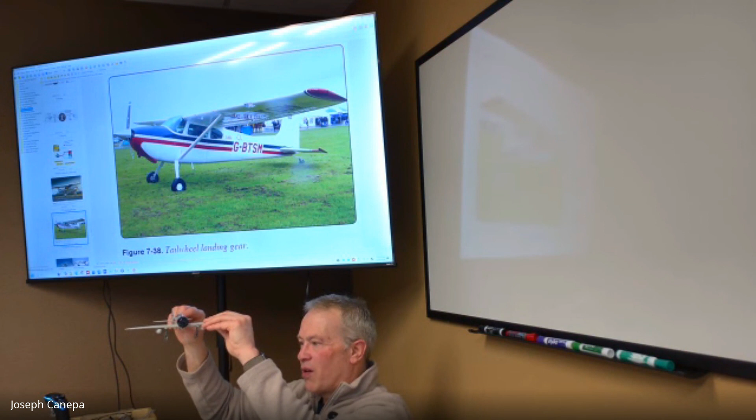Enough relative wind to get that tail to go up in the air. So, okay, let's see here.

Pressure systems—I think we're just about done with this, guys. Pressure systems we use in aircraft so we don't have to wear pressure masks. In this aircraft right here, there's probably a turbocharger. A turbocharger drives a pump that blows air into the cockpit and pressurizes it essentially. That allows the plane to climb to extremely high altitudes, 17, 18, 19,000 feet, areas where we'd actually have to have oxygen.

But if we try to keep the PSI, the pressure—does anybody know what the static pressure is down here roughly in PSI? Yeah, close, 14.7 PSI is what we're breathing right now. This is the pressure we feel. If we go up to 20,000 feet, it's a lot less pressure, and we'd probably pass out within about a minute or so because there's not enough pressure to get the air into our lungs. So that's why we have pressurization systems, and you can set them to different altitudes.

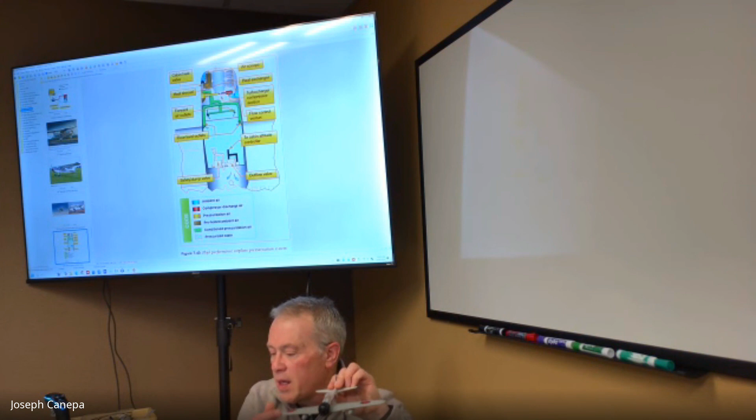Another type of de-icing system would be rubber boots. They actually put those on the fronts of the wings, anywhere basically the wind sees, they'll put those little boots on there. It's like a little rubber inflatable bladder, a series of bladders that fits on the front. Those actually inflate, so if you start developing ice, they'll de-ice the aircraft, they'll inflate and break off the ice.

Yep, that's activated in the air. How bad would that be for the aerodynamics? Well, icing is horrible for the aircraft. Are you talking about the boots, how activating them would affect the aircraft, or the ice itself? How it would affect the aircraft. Negligible - you're going to lose some speed because there's some weight and a little bit of drag, but they're very thin. Those wing boots almost kind of form around, but they're glued onto the leading edge of the wings and the tail surfaces as well. They're also on the props too, but those are heated boots, not inflated boots, I'll show you that in a second.

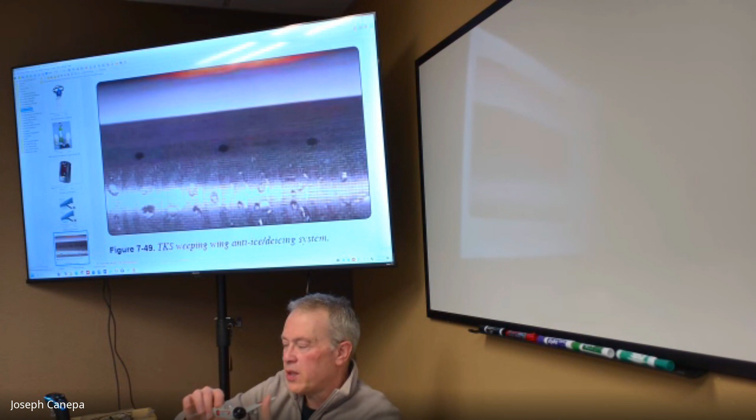That would be not so much a de-ice, more of an anti-ice. It would help prevent ice from forming to begin with, rather than busting it out if it's already there. Yeah, that'd be the biggest concern. I know there's some pressure to it and it might melt some ice, but the best time to use this is before or when you're just heading into icing conditions.

You just let it weep, and because you're flowing through the air, this is the leading edge of the wing we're looking at. It would flow back this way, and that de-icing gel is going to flow back and kind of coat the wing. So they work great, except in really intense icing conditions, which most of us would never fly in if we knew we had really bad icing. But it does, it's there.

So again, that's pressurized anti-icing fluid, whereas the boots are more of a de-icing system. They literally de-ice the wings, not the entire wings, just the leading edge of it. That's an important point. You may have a bunch of ice built up behind the boots that won't break off, though in some cases it'll shed off on its own. But most of the time you're going to have some ice there. The leading edges are what we're really concerned about because we don't want to spoil that airflow as it hits the leading edge of the wing, or create disturbances in the airflow.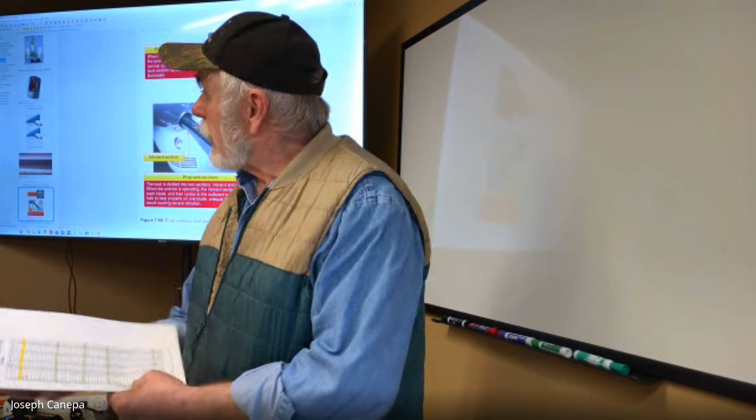So what would your day-to-day consist of? It depends on where you work. If you opt for the airlines, they have a specific criteria for you day to day. If you work for general aviation, you'd be doing everything from oil changes to engine removals, to inspections, to diagnosing problems. It's a wide variety.

In the airlines, you get paid, and the pay is excellent. We are looking for licensed mechanics, so the pay is good. The locations may not be quite as good, depending where you'd have to be at, but that's all up to you. Every industry in aviation is looking for individuals. There's a big shortage, about 11% at present.

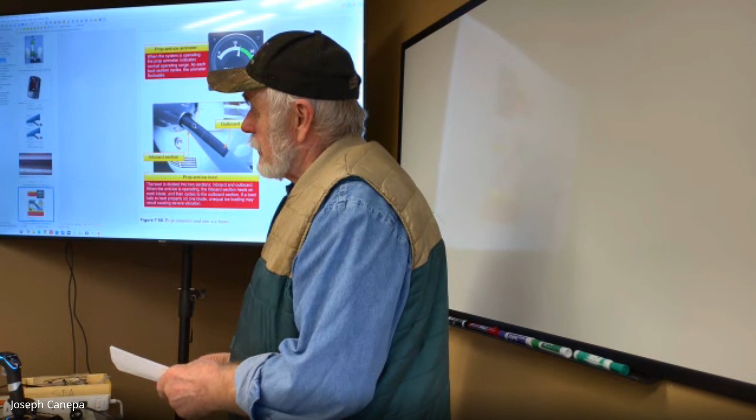So what's the estimate if we have that shortage? The estimated pay at the airlines would be somewhere around $35 per hour, depending on where you're living, where you're located. General aviation is a little less than that.

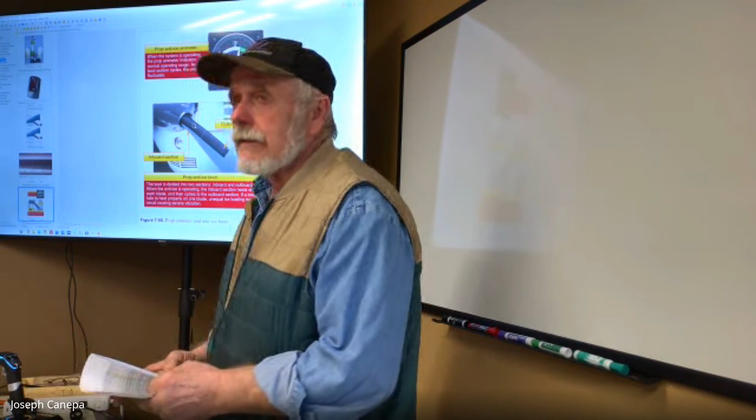What's your favorite plane you've worked on? That's a good question. I guess I'm partial to Beechcraft, because that's what I started on. Is there any particular reason, just out of curiosity? Just because it was built so well, the quality of the workmanship on the Beechcraft. Most of what I worked on when I first started was the Barons, which is a twin engine, medium duty aircraft, 5 to 6 passengers. I always enjoyed working on them.

Somebody told me the Beechcraft is like the Mercedes of aircraft. It is, yeah. The Pipers and Cessnas would be like the Fords and Chevys. Yeah, that is true. The Beechcraft would be what we always call the Cadillac. The ease of maintenance, quality of the maintenance, quality of the construction was quite a bit higher than Cessna or Piper. But I did work on most of them.

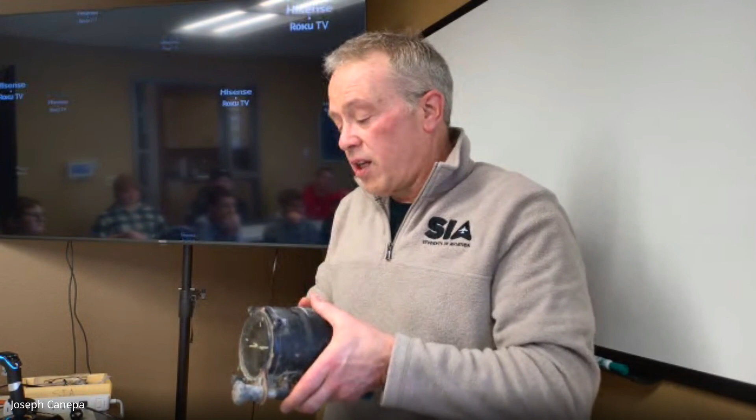The newer style attitude indicators are usually blue on top and brown on the bottom, so it's a little bit easier to tell between sky and ground. And obviously with all the synthetic, digital stuff, it's just a representation of what the sky looks like. Anyway, we'll go into all that stuff next week.